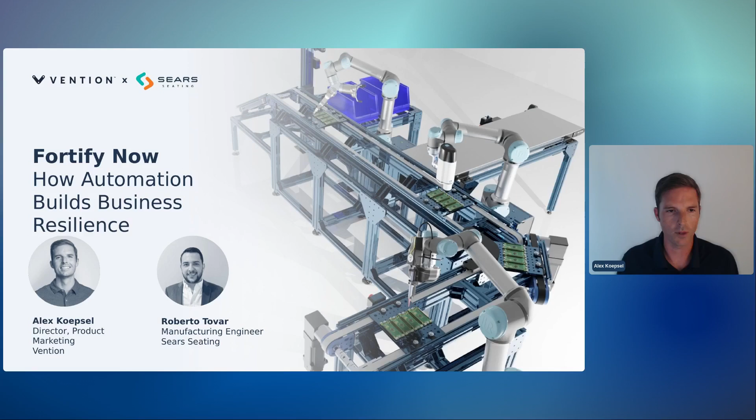Another thing I want to mention, just taking a step back for context for this webinar: in manufacturing, we've talked a lot over the last decade about labor shortages and even most recently rising costs with inflation. Now we have a third thing in the mix with the economic trade uncertainty or trade wars that are going on. I'd say now more than ever, capital efficiency is super important.

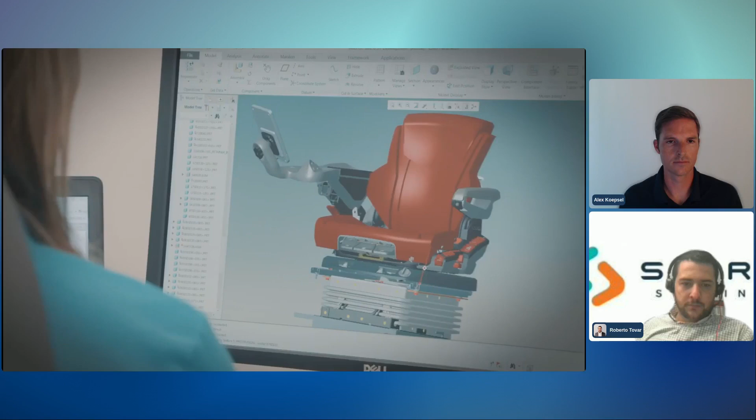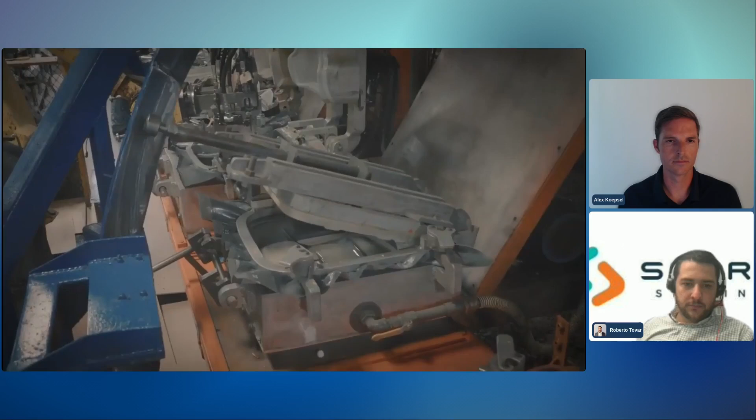Work hard because what you do matters, for your family, for your customers, for your sense of accomplishment. There may be hundreds of good reasons for your hard work, and at Sears Seating, we support them all, because we believe that while you work hard, there's no reason you shouldn't work comfortably. Whether you're caring for the land, helping to construct the future, or moving the materials that keep the world going, you should be comfortable doing it. In fact, your comfort is our main goal at Sears Seating. We put all of our effort into the physical science behind comfort, because we know that better ergonomics and innovation means less fatigue and more energy. It means better health for you. Rely on our global team with over 160 years of experience, bringing passion and commitment to the work vehicle industry. All so that you can work hard and work comfortably. Sears Seating.

I guess that answered my question on when you guys were founded, 160 plus years ago. So you've been doing this for a while. Maybe, I'm curious, Roberto, what do you do in your role as manufacturing engineer? And then would love to jump in and learn more about the past 12 to 24 months, like what have been the main goals for you on the manufacturing side?

As a manufacturing engineer, right now the role covers a lot of stuff, from project management to manufacturing or process engineering. But my main duties right now are that we're expanding our operation to a new facility. So we started to recover and value stream map the current opportunities we have in the current facilities, and start checking and taking a step back on how we can improve from a layout standpoint, manufacturing design, fixturing design, and how we start taking that path for automation.

Over the last 12 months, we've been working on a new facility to expand our manufacturing capacity to meet our customer demand and new projects coming in the next couple of years. Everything is about improving efficiency with lean manufacturing thinking and continuous improvement thinking. We started taking a step back and checking how the operation is running right now, and where we need improvements from the manufacturing standpoint, adding value for safety, ergonomics, and better material flow on our manufacturing lines. That's where we started looking for better options of fixturing design and conveyor design, and how automation can help us meet those metrics and goals.

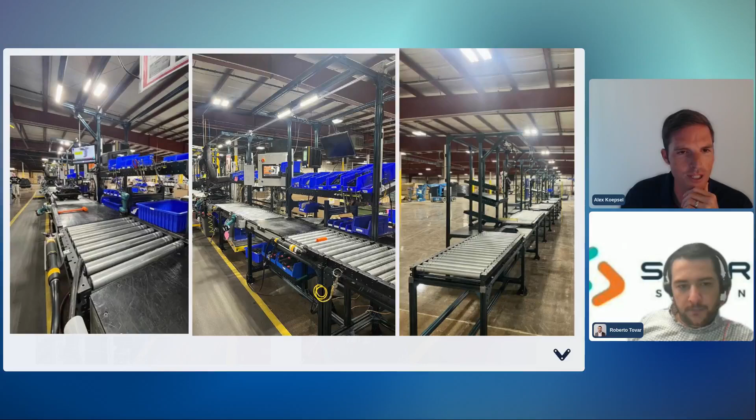Let me go back to the beginning. Yeah, so if you can see this one here, can you walk us through a little bit of what's going on here? Yeah, so like I mentioned at the beginning, we're mounting a new facility.

Our manufacturing designs used to be like C-shaped cells, and we started thinking about removing that and going more with straight lines with feeder stations, eliminating a lot of variations that we had on our seats for feeder stations. That helps us do better work balance and better industrial engineering work.

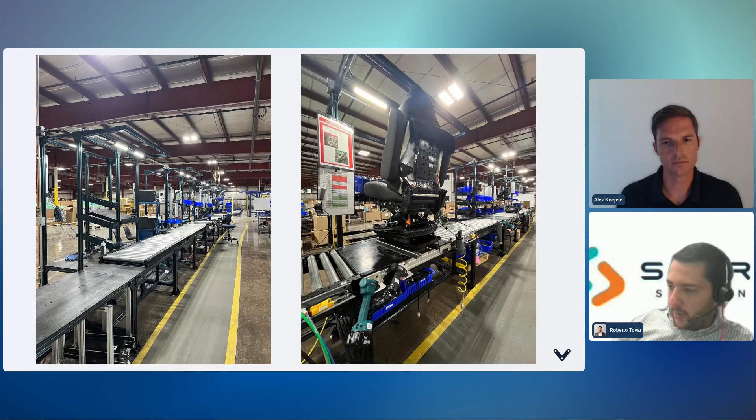When we start benchmarking and going through this journey, the reality is that a lot of seat manufacturers already have automation lines and turnkey solutions for all that. So we said, okay, we're not going to make the call until we've tested out that this new line design concept is working and is adding value to what Sears is doing.

We didn't want to take it all the way through to automation. So when we started the conversation with the Vention team, it was like, let's start just making straight lines with conveyors, and we're going to escalate the automation as we go, station by station, so we really understand what the needs are for each operator.

Even though you have a lot of industrial engineering work, documentation and all that, sometimes it just happens really differently. So the opportunity we saw is that we went back to basics and did the complete sequence of events. We started going through takt time study times and developing the real work content and the real work that is happening station by station.

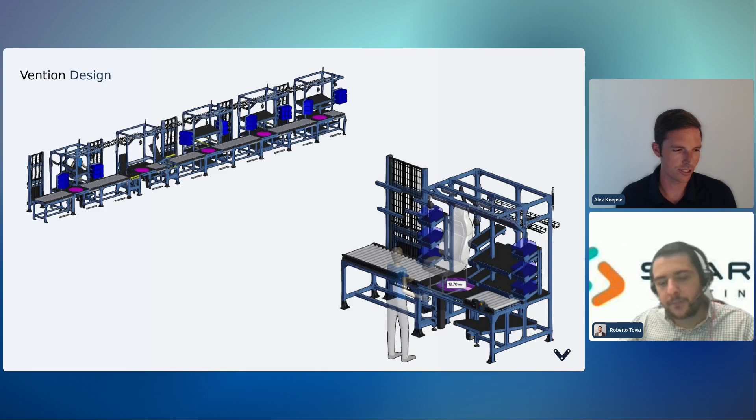There was something else you mentioned last time we chatted, about going through the process of working with Vention versus a traditional integrator and where that payment is. I think the quotes were a lot different that you were getting - Vention was a lot lower than what you were getting from integrators, again because of that. I don't know if you want to speak to that.

Yeah, I mean, 100%. I think you got a picture, the latest picture, Alex. I just want to put up slide 9. So this one is fine.

Just for an example, we had a lot of stuff that's been internally made for our maintenance department or for internal manufacturing engineers who wrote an idea and just did something in house.

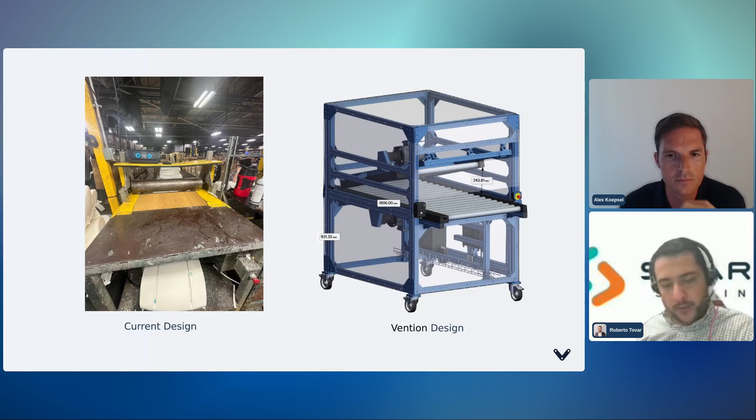So we saw a lot of opportunity that is really easy from Vention to start doing automation control skills. Besides, if you go with a turnkey supplier, their controls engineers develop the code and give you the solution, but whenever you get an issue on the shop floor, if you don't have a dedicated control engineer that understands the control words and all that language, it's going to be a lot of downtime or cost a lot of money paying really skilled people who understand all that. So we also saw a lot of potential for raising the manufacturing engineering role to start the advanced manufacturing engineer path, by having skills for control engineering developed just by using the controls we use with Vention.

Yeah, that's awesome. Upskilling people, giving them new job capacity and new stuff to learn. I'm sure engineers especially love doing that. And then like you said, you guys can make changes faster without having to get us involved.

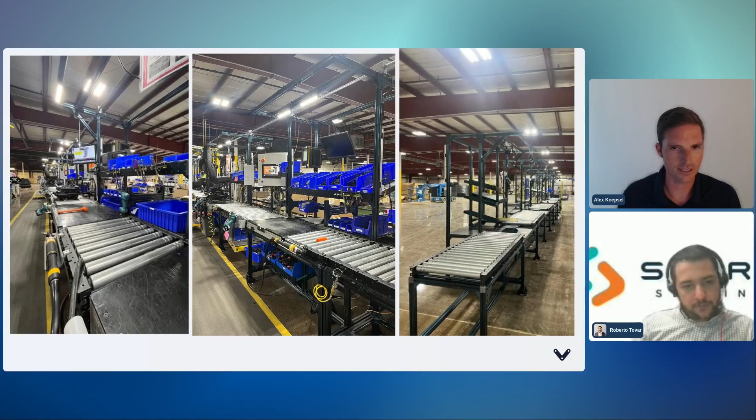It's built and in your facility. I wanted to talk about results so far. You've already mentioned a few internal results, like you were able to save some capex by working with Vention—it was a lower quote than integrators. You were able to create this new job opportunity for people, for engineers, teaching them Python programming and controls engineering. Flipping to the business side, are these about to go into operation in the next few weeks, and that's where you'll start to see production capacity go up, efficiency, and all the ergonomic benefits? Is that true?

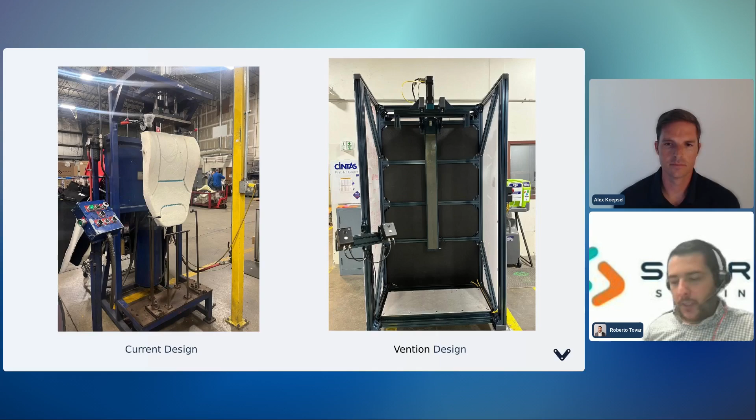That's correct. So we started with one complete line, Alex. We had a couple of projects with painful points where, I mean, we have this machine but it's obsolete or it's not the best design. So we had to work with you guys on a different design, but eventually we got the opportunity with Vention to develop a complete line for all the fixtures and all the main lines and stations that we built, and that's kind of the picture that you're showing.

So we had the opportunity to build a complete business case with Vention's solution, and sometimes even though it's maybe not a turnkey solution, basically our team developed the last part of the project by doing implementation on the shop floor. And that is where I see the most achievable value for us as a team, because it's not like a supplier where you have an issue, go to an automation supplier, and they just give you the solution—of course you get training, debugging process, and the solution that works.

The real value added is that there were a lot of meetings with Vention as we developed this stage, really understanding the real need of the customer and what we really need to implement to make this efficient—real estate wise, layout, and simulating how it needs to be. Besides, working with a turnkey solution supplier, they develop the complete turnkey solution and just give you the layout and the prints, and then you have to arrange your layout to actually fit that machine. Sometimes when you say my real estate is complex, or I have to move stuff around to implement that solution, we played it the other way around: we said, okay, this is the real estate that we have, let's get a solution according to that real estate.

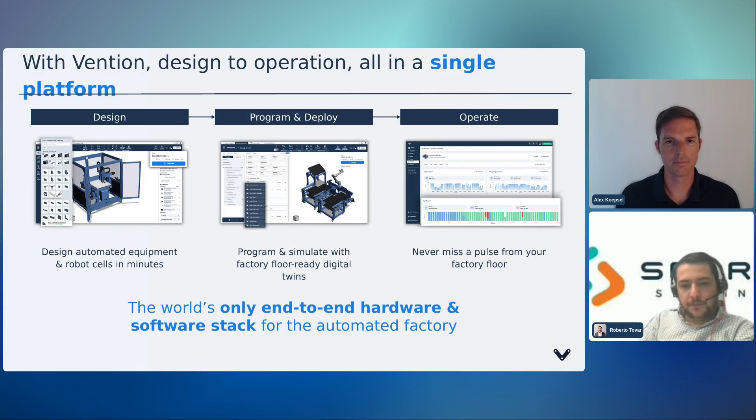I think with Vention, we're using the same materials every other integrator or supplier uses, so the material costs look the same. But the place where we can add value is the custom engineering - it's just faster and more efficient, and that reduces the total CapEx spend. You can either work with us and we design it, or you guys can design it on your own, which maybe cuts out even more costs.

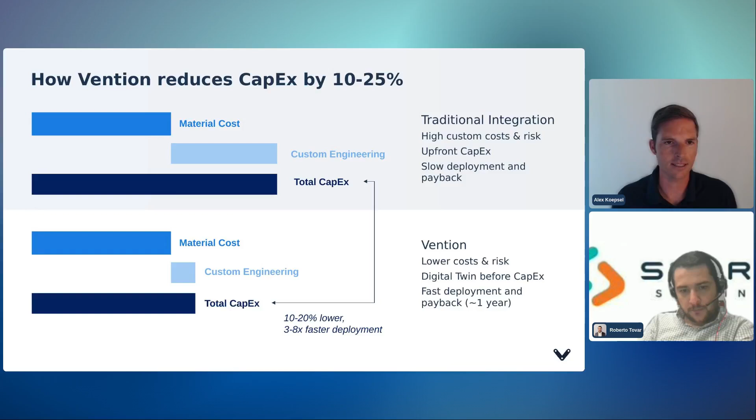Our return on investment was about a little bit more than a year when we started putting the numbers on it. It is more a matter of getting a really custom design compared to any other supplier, maybe a custom or turnkey solution. When we started putting together that business case, it was about 15 months for return of investment.

Maybe it's hard to do an apples to apples return of investment because at some point it's a win-win situation - it's not really simple to compare to a turnkey solution, because with Vention you still need input from your team, from maintenance and manufacturing, to do the proper implementation on the shop floor. So it's kind of hard to compare apples to apples, but that's where I see it - you empower the team to actually be part of the solution, help on the design, and implement it. It was kind of hard for us to compare apples to apples, but the return of investment analysis we did was about 15 months.